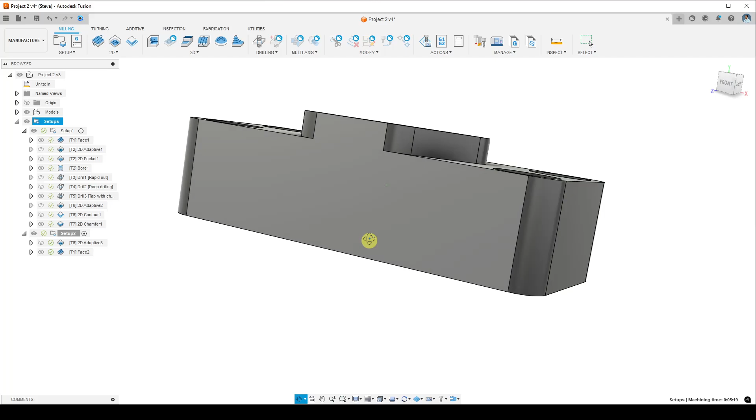Okay, so at the end of the last video, we finished all the toolpaths for Project 2, Setup 1 and Setup 2 here. And now, let's start by working on our machining notes. So the machining notes are kind of a list of really important bits of information that we're going to want to pass on to whoever is going to machine this thing. Maybe that's going to be us later, or maybe that's going to be somebody else. But either way, machining notes are really important.

So to do that, I'm going to right click Setup 1 and say Edit Notes at the bottom here. And I'm going to make the notes a little bit bigger, and we can start writing notes. Okay, so you can write anything in here that you think is important for the machinist to know. I'm going to start with using G54 for work coordinate system, WCS. And I'm also going to say WCS is at top center of stock.

I'm also going to say all speeds and feeds are for aluminum. Okay, the next thing that I'm going to write here is something we have to figure out, which is what we did in Project 1, the minimum part stickout. So I'm going to write minimum part stickout equals. And now we've got to go figure out what that is. So go ahead and click OK, and let's see what the minimum part stickout is.

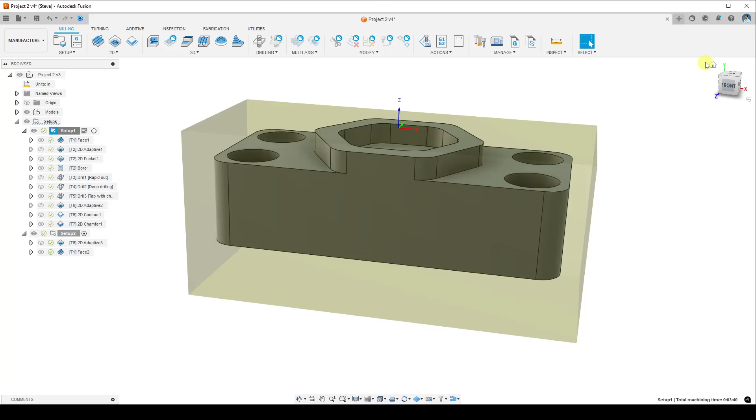So the minimum part stickout, if you remember from Project 1, we can think about two ways. It is the minimum amount that the stock needs to be sticking out of the vise in order to avoid collisions. It's also the distance below the top of the stock that the lowest tool goes. So what I like to do is to look at this from the side and highlight Setup 1, so I have the stock highlighted. And then I just hover over these different toolpaths and try and see which one actually goes the lowest. So this one goes pretty low.

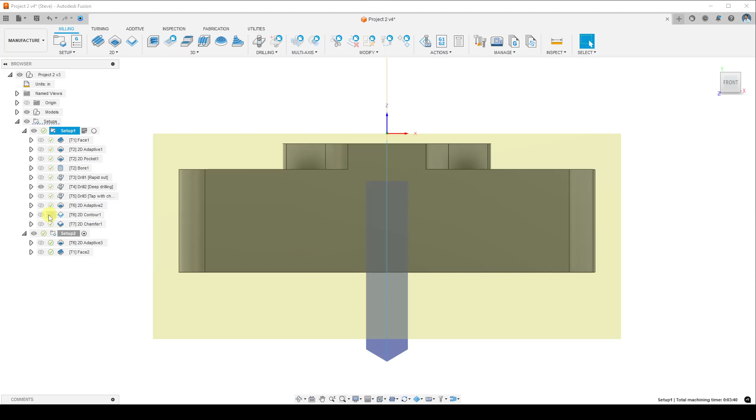I'm going to turn it on with the little eyeball here, just to keep it on. And I'm going to keep going. The tap goes a little bit. Maybe adaptive, the contour, and the chamfer. So I'm going to take a look at this contour one as well, really comparing these two. So definitely the drill bit goes lower. However, we don't need to worry about the drill colliding with the vise as long as we set this up on parallels off of the bottom of the vise. And then we don't have to worry about that colliding.

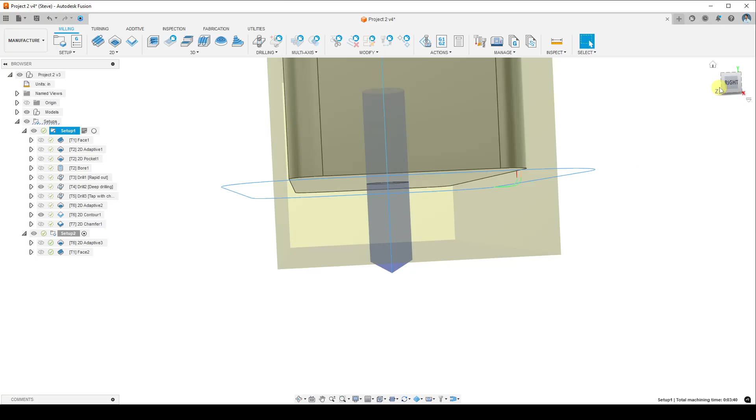Because if we were to base our minimum part stickout on this drill bit, you would have to stick out more than the stock, which is not realistic. So I'm going to turn that one off then. Deep drilling. And I'm actually going to write that note. It's a good note. Before minimum part stickout, I'm going to say elevate the stock from the bottom of the vise with parallels.

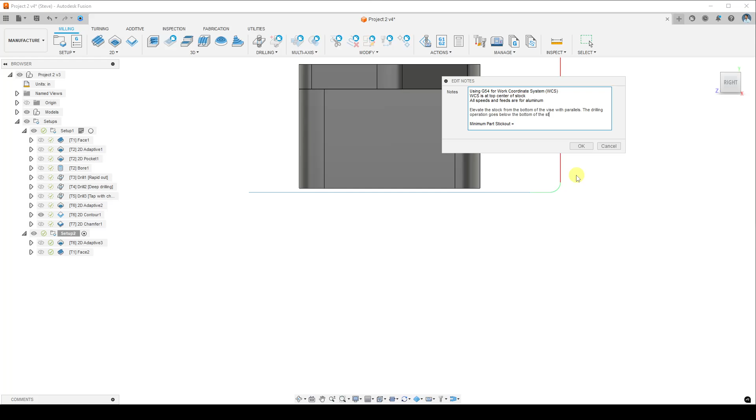And let's see, we could say that the drilling operation goes below the bottom of the stock. Okay, go and click OK, and we're going to figure out how low that drill goes below the bottom of the stock. So we can see it's going to be this drilling operation here.

So I'm going to right click it and say Edit, just so we can look at the Heights tab. It looks like there's two things here. One is drill tip through bottom, so the tip of the drill bit has extended through the bottom of the material, and then another 50 thousandths of an inch.

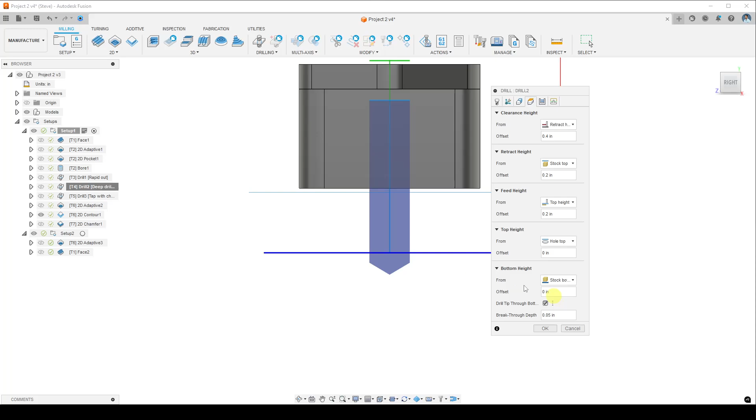But 50 thousandths of an inch doesn't account for the tip of this drill bit. So, to be safe, 50 thousandths is from this blue line to this edge here. Double of that is 0.1. I think we could say 0.25. If we leave like 0.25 inch clearance below the bottom, make sure that it's elevated at least 0.25 from the bottom, then we should be okay.

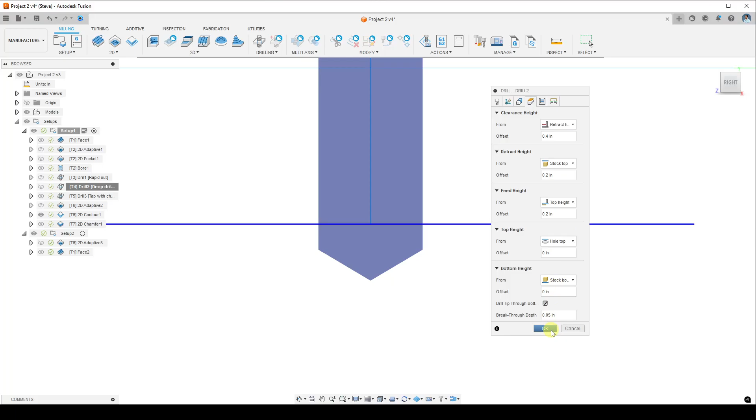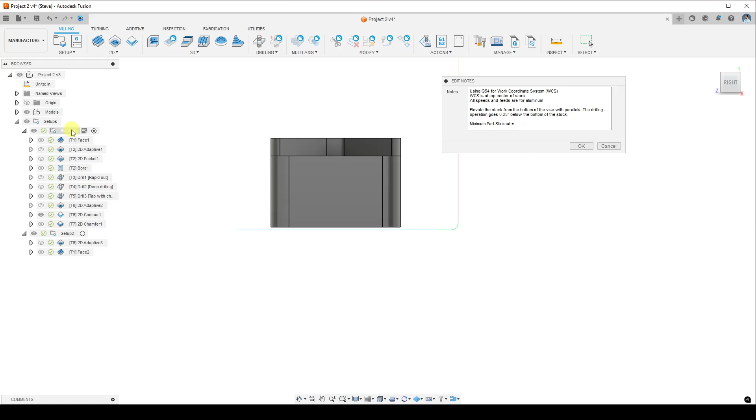So go and click OK. I'm going to go back to machining notes here. I'm going to say operation goes 0.25 inches below the bottom of the stock. Okay, so that'll be good for that one. But for the minimum part stick out, if I click on setup 1 again here, click OK, click on setup 1, we have to figure that out.

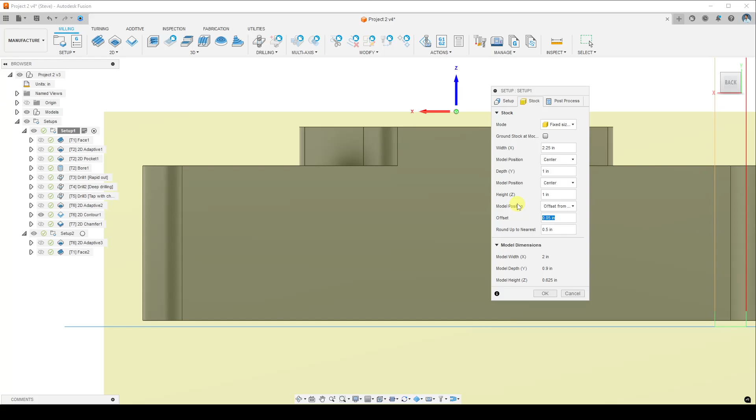It's actually going to be the same calculation that it was for project 1. It's the offset from top plus the model thickness plus the bottom height offset. So let's find out what the top offset is. I'm going to right click on setup 1 and edit, because we set that in here in the stock tab. The offset is 50 thou from Z. So click OK.

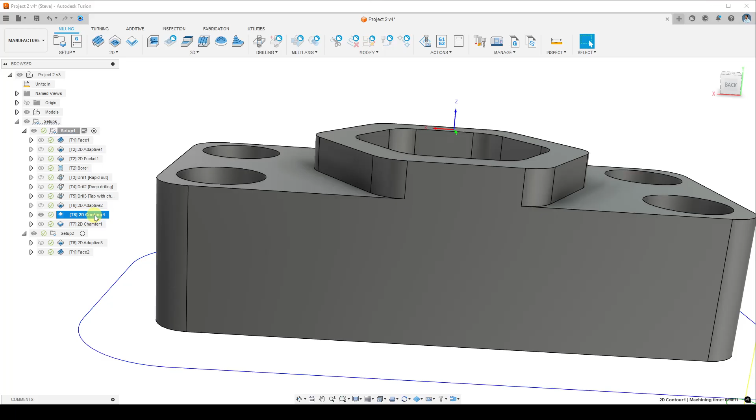And then the model thickness, if I click on the inspect tool and click on the top surface here and the bottom surface there, we see 0.625. Okay, keep that in mind. And then the last one is going to be this contour toolpath. I'm going to right click and edit and see that in the heights tab, the bottom height offset is negative 20 thousandths of an inch, negative 0.02. Okay, so we've got to add all those numbers together. See if I can remember them. Click OK. Click on the machining notes button there.

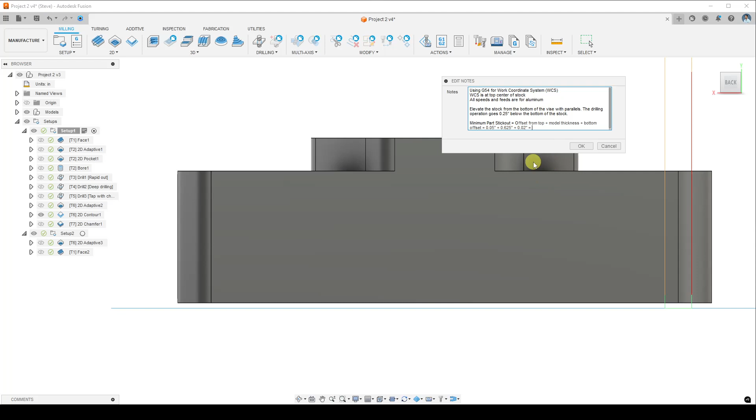Minimum part stick out is, I'm going to write this out, offset from top plus model thickness plus bottom offset equals: offset from top is 0.05 inches, plus model thickness 0.625, I believe, plus bottom height offset 0.02 inches equals, let's see, 675, 695, 0.695 inches. Is that right? Yeah, 0.695 inches. Okay, so our minimum part stick out is 0.695 inches. Click OK. All right, and I'm going to turn that one off.

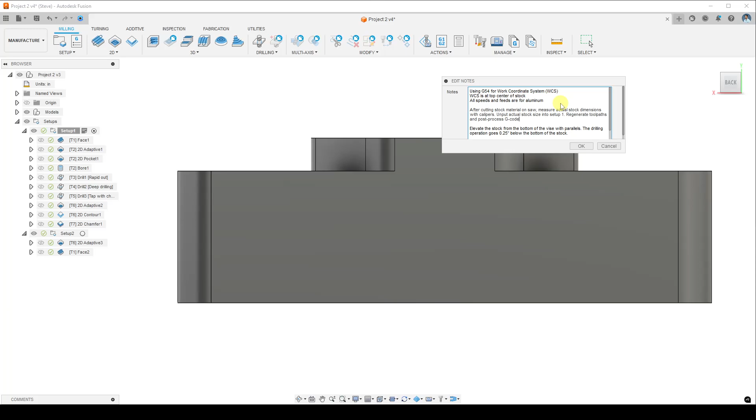Last thing, I'm going to open my machining notes again. Up here after the first section, I'm going to make another section. I'm going to say: after cutting stock material on a saw, like a bandsaw or something, measure actual stock dimensions with calipers, input actual stock size into setup 1, regenerate toolpaths, and post process G-code. Okay. All right, click OK.

And what I mean by that, we went over this in project 1, but I'm going to go over it again. Right click setup 1 and click edit. If you go to the stock tab, these dimensions here were guesses, right? And if this actually deviates at all, it should affect a lot of these toolpaths. Toolpaths will only do the appropriate motions in the correct places and the appropriate amount of material removal if these are accurate.

So let's say that we cut our piece and it's actually 2.35 inches long, and we click OK. Now we have to regenerate all these toolpaths based on the new stock size. So I'm going to right click setup 1 and generate. And we have a second setup, so we have to do that with setup 2 as well. Right click setup 2 and generate. So they've recalculated, and that should be good. So make sure that when you actually cut your stock, you measure it with calipers, and then you regenerate the toolpaths before you post-process the G-code.

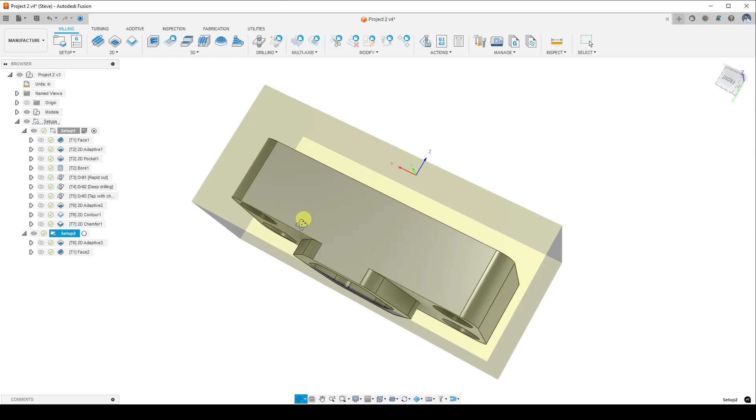Okay, so the other thing we're going to need to do here is make machining notes for setup 2. So I'm going to click on the machining notes. I'm just going to copy all of them. Copy, click OK, right click on setup 2 and edit notes. And I'm going to paste them in here.

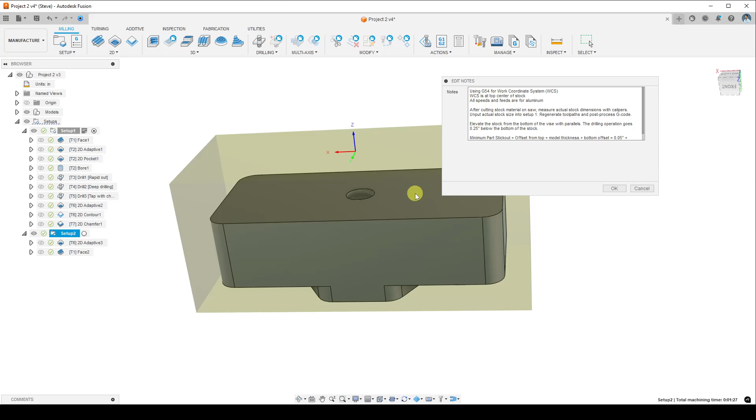And let's see if these things are still true. Okay, so what do you say? Top one, using G54 for work coordinate system. Yeah, that's still true. Okay. Second one, WCS is at center of stock. Yes. All speeds and feeds are aluminum. Yes. After cutting stock, measure actual stock size with calipers. That one's still okay. Elevate the stock from the bottom of the vise with parallels.

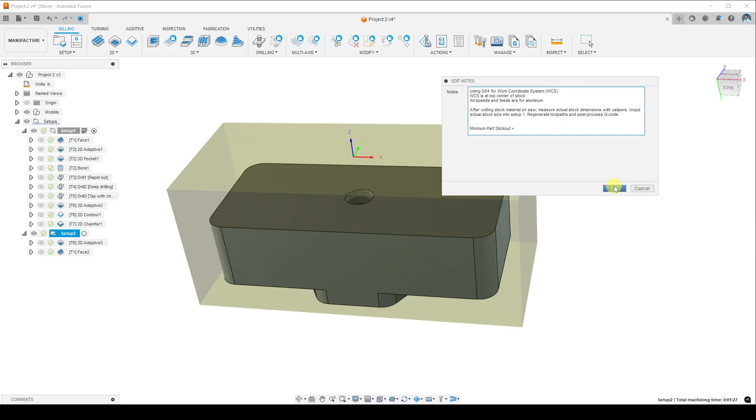We don't need this one anymore because there's not a drilling operation in this setup. We'll probably elevate it with parallels, but not necessarily. Depends on the size of our vise. Okay, and the last one, minimum part stick out. Now this is where it gets interesting. I'm going to delete all that because our minimum part stick out is actually going to be different because this is a whole new setup. So we gotta start over and see what it is. So go and click OK.

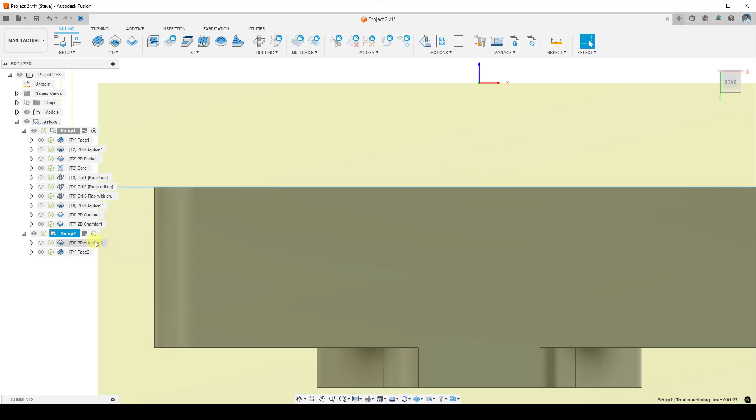And here's what we do. For setup 2, we take a look at it from the side, and we hover over the different toolpaths and see which one goes lower. Well, it looks like they actually both go to the same distance, right? They both go to what is effectively the top of the model now, right? So we have to figure out what that distance is. And the distance is really that from the work coordinate system origin, the top of the stock here, down to that toolpath. There's no way to just measure that. There's no tool that will just measure it. So we have to kind of calculate it.

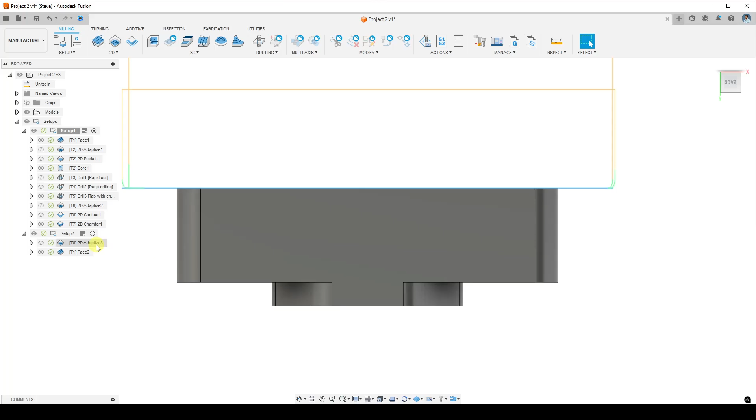And it looks like here it's going to be different from what we did the first time. So it's going to be our overall stock height, so the Z value for the stock, minus the top offset, minus the model thickness. And the only reason I know that is just because that's what it looks like. There's no formula. Each time you figure out minimum part stick out, it's going to be slightly different. In this case, it really depends on the toolpaths and the stock and orientation of things. For this one, that's the calculation. But you'll have to figure that out for each one, and it can be kind of tricky.

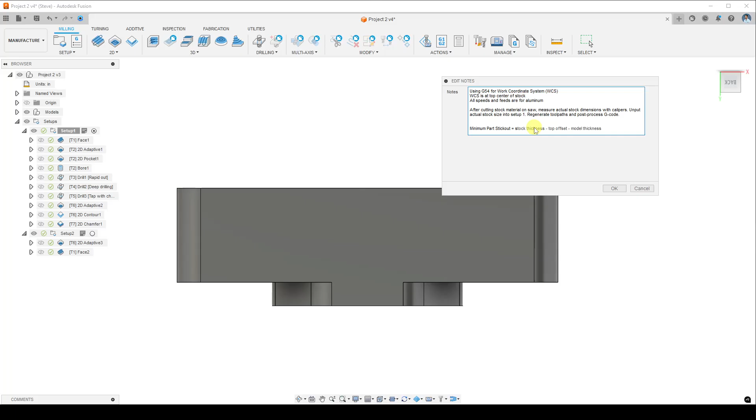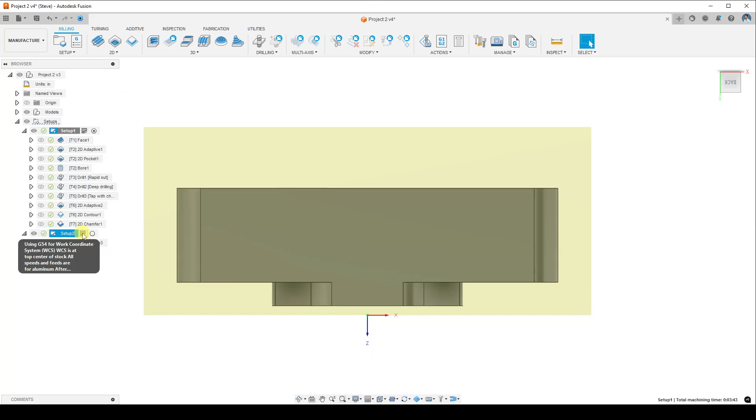So for here, I'm going to write stock thickness minus top offset minus model thickness. I'm going to say equals, and I'm going to click OK. And let's check that out. Let's go to right click setup 1 and edit, and go to stock. So my stock height is 1 inch and my offset is 0.05. Okay, click OK. And then the other thing I need to know is my model thickness, which is 0.625.

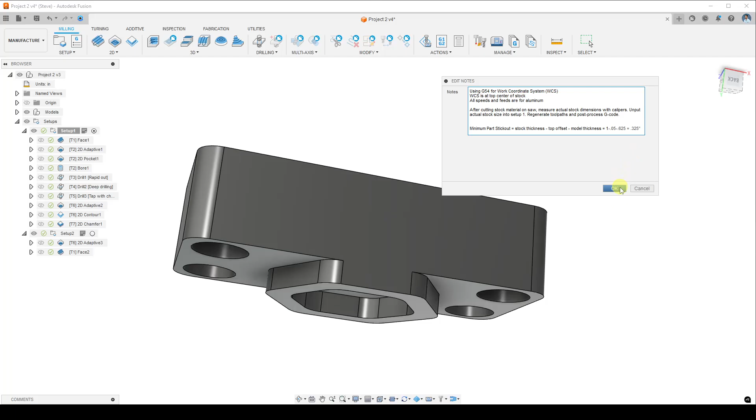Okay, so let's go back to setup 2 notes. So stock thickness is 1 minus top offset 0.05 minus model thickness, which is 0.625. I'm just going to do that on my calculator. 1 minus 0.05 minus 0.625 is 0.325. Equals 0.325 inches. Okay, so a new minimum part stick out for setup 2. Go ahead and click OK. All right. So those are our machining notes for setup 1 and setup 2.

The next thing that we want to do is make setup sheets. Setup sheets are going to give us all of the relevant information for each setup, in terms of which tools we're using, what are the tool numbers, what's the stock size, where's the work coordinate system, all the information that a machinist might need to know, including our machine notes at the very beginning. One thing about that is it's going to take a snapshot of whatever you happen to be looking at. So for setup 1, I'm working on the top, so I'm going to get a little angled view here, and then click on one of the view cube corners to get a nice isometric view.

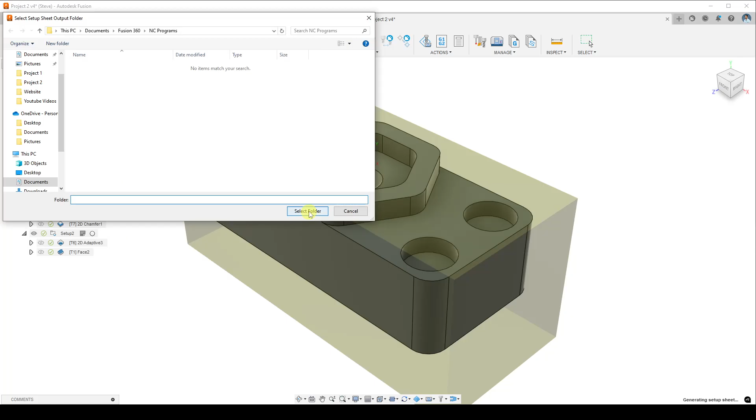Okay, and now I right click on setup 1 and say setup sheet, and you can just click select folder, or I think on a Mac it looks a little bit different, and it should open up in a web browser your setup sheet.

So it says, program comment from before, setup, and then our machining notes, including our minimum part stickout, all the information about the stock, the tools, number of operations, number of tools, tool numbers, the list of the tools that are machining, and then the order of the operations.

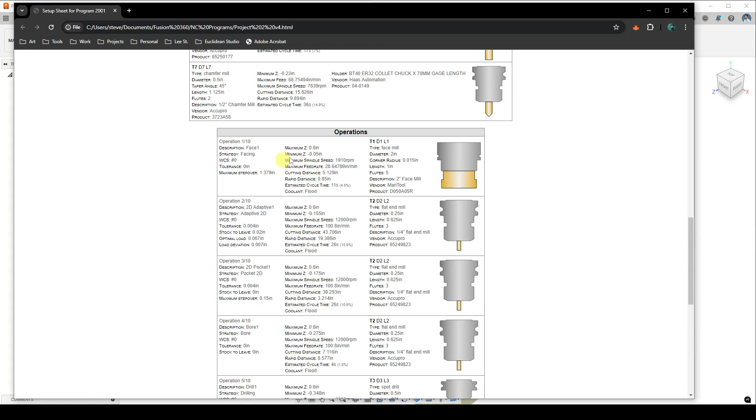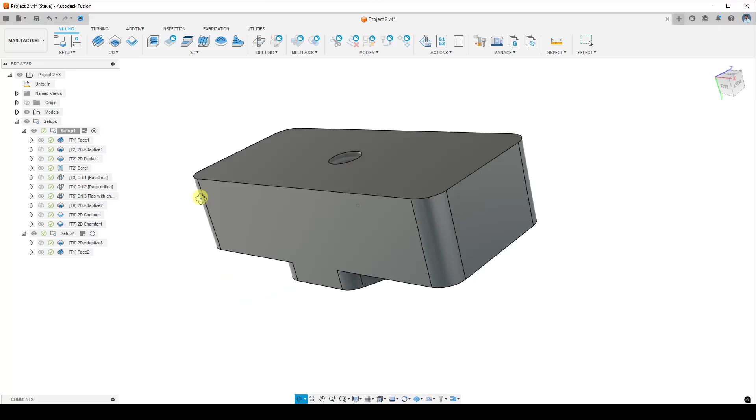The thing we're going to do next is we're actually going to make a second setup sheet for setup 2. So I'm going to flip this over and get a nice isometric view of the bottom of this part and make sure that the X is pointing in a good direction. That looks great. So I'm going to right click setup 2 and say setup sheet and click through that pop-up.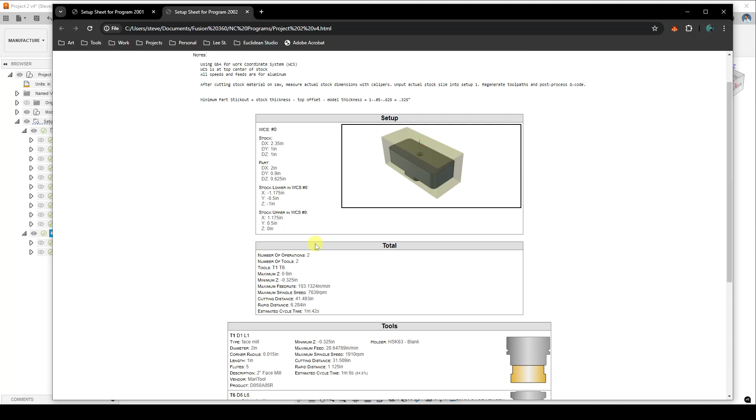We can see here that we now have setup 2 with our new minimum part stickout, and all of our notes. And same thing, an image, all the information, 2 operations. And we could see the minimum Z, negative 0.325 and negative 0.325, which is what we calculated. Okay. So that all looks pretty good. Those are setup sheets for setup 1 and setup 2.

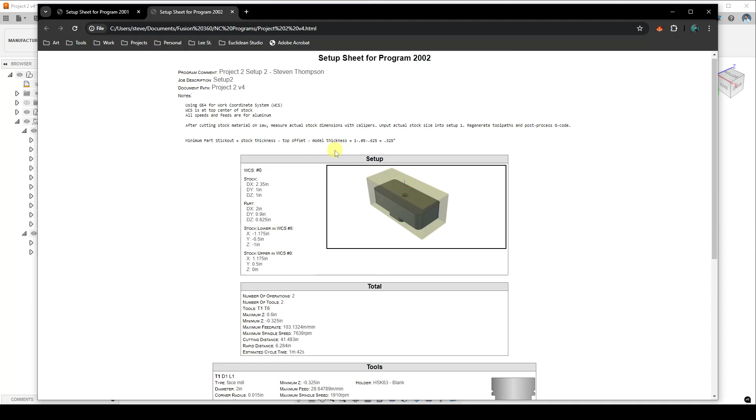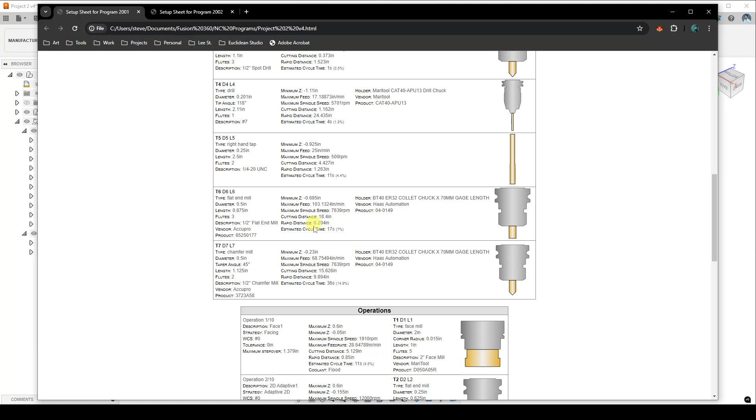So you have to make a setup sheet for each new setup because, even though it's the same part, it's a very different program. Setup 2 has 2 tool paths with 2 different tools. Setup 1 has 10 operations with 7 tools, and they're all in different orders. They're totally different. So you need a setup sheet for each one. And the thing that I would recommend is that you print or save a PDF of these. So you can do like a Control P or Command P to print and save a PDF of these.

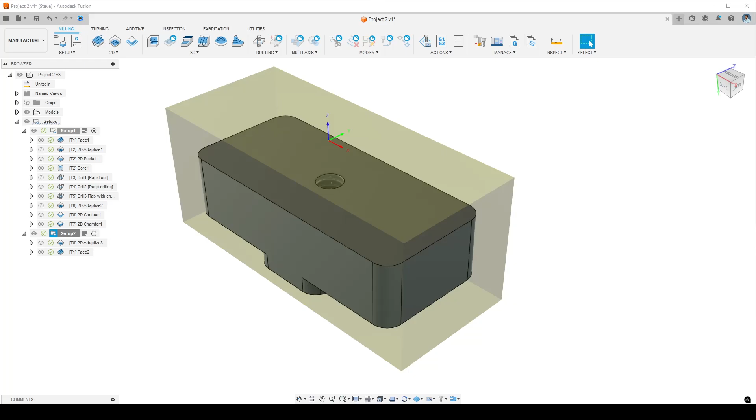These are only going to be accurate if they're current. So if you change anything in your program, then you need to update your setup sheets, right? Any major changes or any minor changes really in your program, you also need to update your setup sheets so that they are the most current.

Okay, so the last thing that we got to do here is we got to post-process the G-code. So for this, we are going to do the 2 setups separately. Now, the way that you do this depends on the capabilities of your machine. If you have a machine that has a tool changer, you can post-process all of these together, and it will automatically change tools between tool paths. Sometimes if your machine doesn't have a tool changer, you can still do the whole setup together, and then it'll have you manually change tools in between.

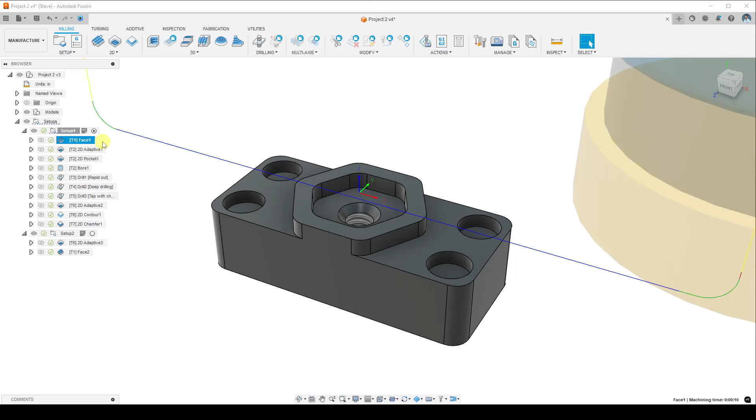Sometimes it makes more sense to post-process them separately. So I would have to post-process this first one by itself. I could post-process as long as it doesn't involve a tool change, right? So these 3 tool paths all use the same tool. I could post-process those together. So it really depends on your machine setup.

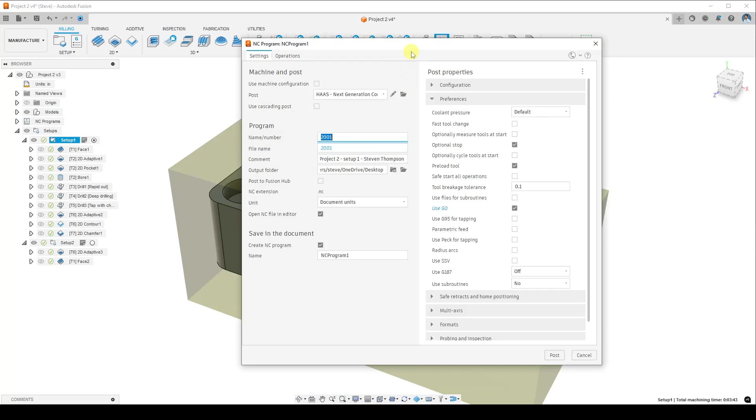So I'm going to right-click setup 1 here and say post-process. And we have the post-process dialog box. For post, you can look at your recent posts here, or you can choose from the library. We went over this in Project 1, but there's basically the Fusion library where you have all the list of post processors, and really the thing that you need to do is to figure out which machine you're using, which is the correct post processor for that machine.

So for instance, in the Fusion library, we're gonna be post processing to a Haas machine. Haas has all of these different post processors because they make a bunch of different types of machines, right? So some of them have very different capabilities and they need a different post processor.

So even if you have a Haas machine, you still need to know, okay, well, what type of Haas machine is it and what post processor does it need in order to make G-code that my machine can read. So that's something you got to figure out. You can figure it out either from the manufacturer, or you can reach out to the Fusion team.

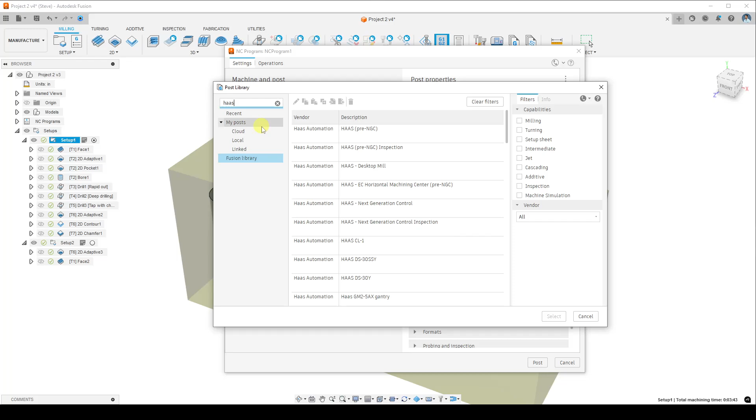So I have some saved in my cloud. So I have, let's see, I have the Haas Next Generation Control. So I just choose this one here and say select. So however you choose it, there's the NGC, or whatever your post processor, it should be in here. Program name number 2001, that's good. I set that up in the setup and the comment.

And then it's going to save it someplace, so just make sure that it's going to save someplace here that you know where it is. I'm going to open NC file in editor so I can see what it looks like, but you don't have to. And then I'm going to change any post properties, any configuration properties in here.

So this post processor, the Haas Next Generation Control post processor, works for a bunch of different types of machines, and they may be set up differently. They may have different capabilities, and this post properties is where you kind of specify what your machine can do, and different ways you want the G code to run to your machine.

So, for instance, I want option stop on, preload tool on. I want to say use G0 and G187 off. These are just kind of things that I found works for the machine that I'm running. And then once you've set all of your post properties, click post, and you have your G code successfully posted.

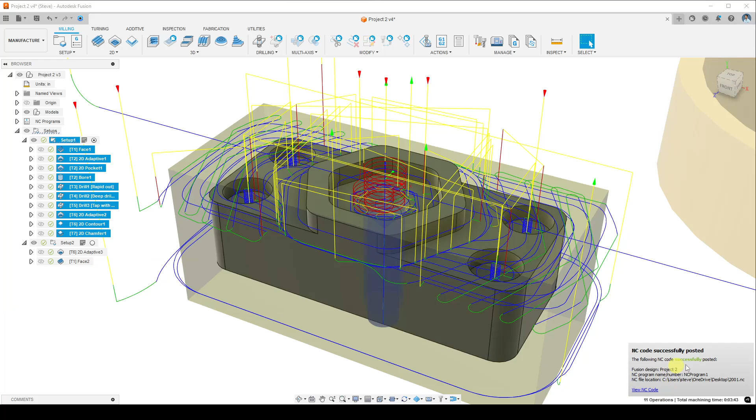And what that looks like is a .nc file, or depending on the machine you're going to, it might be slightly different. And this is it here. This is your G code. So it starts with project and your name. This is the project comment. And then everything in parentheses are comments. So these just say what the different tools are and their kind of geometries and specifics.

And then we start out on the G code. And then we have our first operation, which is the facing operation here. T1, tool 1, M6, change tool. Next line, S1910, spindle 1910 RPMs, M3 clockwise. And then it goes through all the G code. Face, adaptive, all the way through your whole setup one.

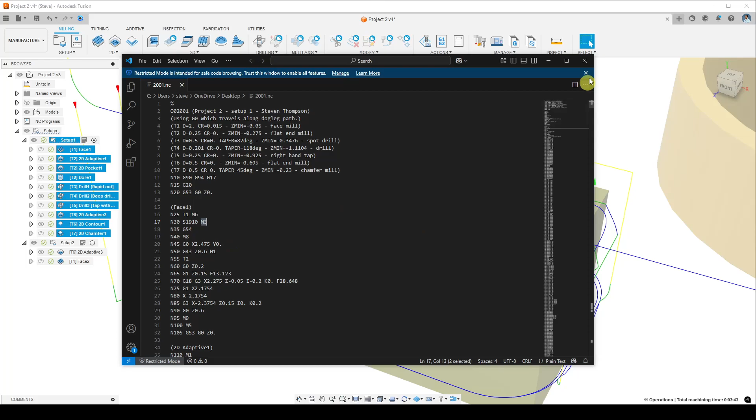Okay, we're not going to go over really how to read G code in this tutorial. We'll have other tutorials where we go more into the details of what G code is and how it works and what it means. But for now, we're just going to create the NC file, or the G code file, and we can run this on a CNC machine. I'm going to close that out.

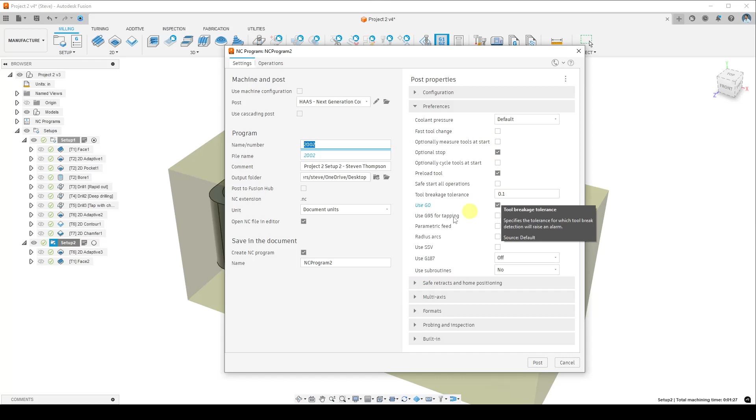I'm going to do the same thing for setup 2. Right click setup 2 and post process. And it probably will have saved some information from before, so it already knows the post processor I'm trying to use. File name number, that looks good. Saving it in a good spot. And it's even saved some of the preferences that I set the last time. And go ahead and click post.

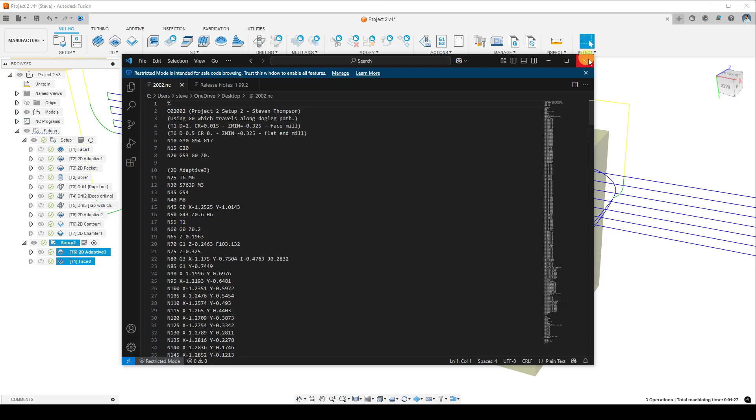And that's these files here. And there's the G code. Okay. Looks good. So these are the files that you're going to take to your machine, and you're going to get them onto your machine. Different machines can do this differently. Some you can connect on a network. Others you have to put it on a thumb drive and transfer it over like that. But that is the G code that you will run on your machine.

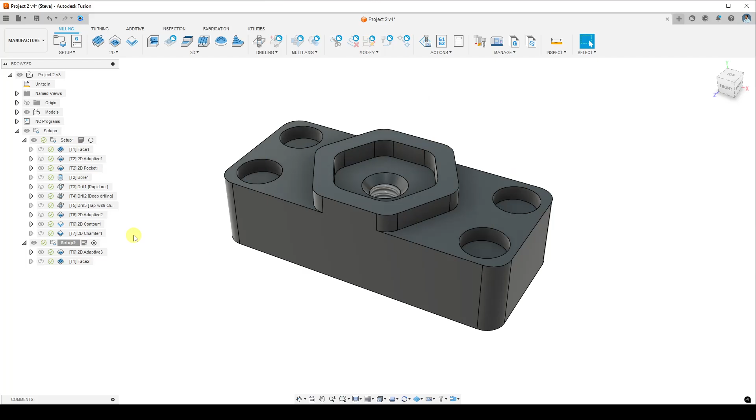So that is it for project 2. We've done everything from the setups, all the toolpaths, the simulations, changed all the details for all the toolpaths to make them just right, made our machining notes, made our setup sheets, and post-processed G-code. Yep, so that is it for project 2.

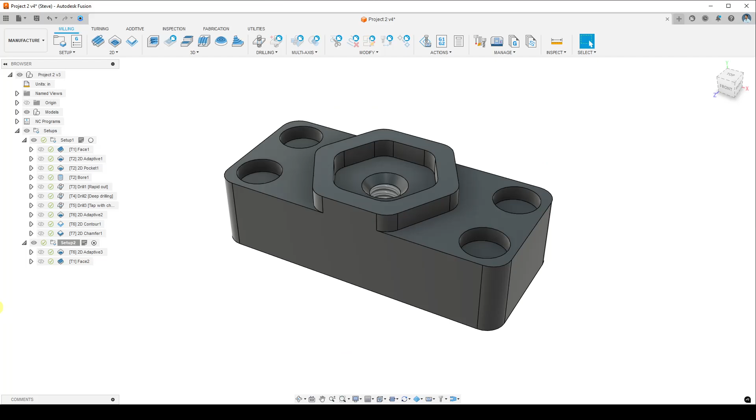Go ahead and move on to project 3, and we're going to get into some newer concepts, and we're going to practice CAM programming even more. So I will see you over there at project 3.